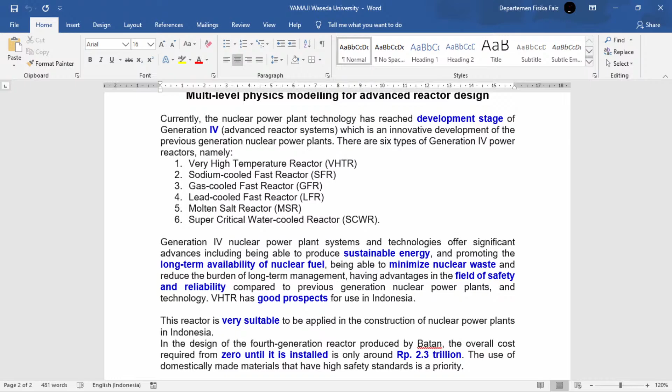Generation 4 is also able to minimize nuclear waste and reduce the burden of long-term management, as well as having advantages in the field of safety and reliability.

We can say that generation 4 nuclear power plants are a good prospect if used in Indonesia or other countries. I read in some magazine or website that if we design generation 4 in Indonesia from zero to finish until installation, the cost is around 2.3 trillion, not 11 trillion. Just 2.3 trillion. So it's a very good prospect in Indonesia.

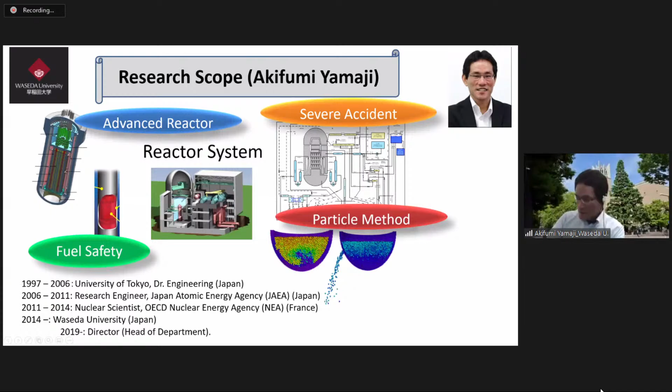Going into the contents of my presentation today, I have prepared some slides in basically two sections. One is an introduction to reactor core design—maybe for professors this won't be so new, it's introductory to core design, reactor physics, thermal hydraulics, and fuel performance. Part two is a brief introduction to advanced reactor design, but I specifically picked what I know best, which is the supercritical water-cooled reactor, so I'll talk a bit about SCWR. I've picked an example like minor actinide transmutation with SCWR. Let's see if I can arrange my presentation well.

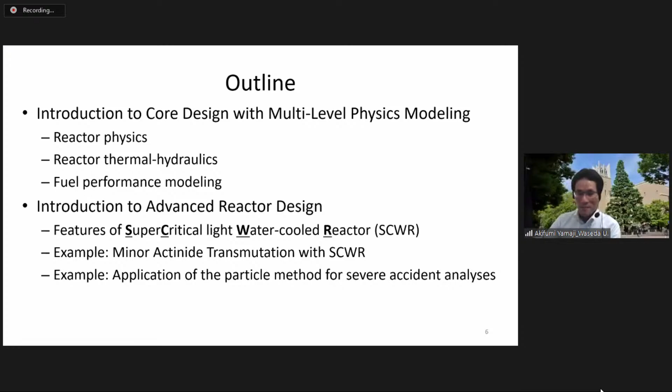Let me start with introduction to core design, reactor core design. So what is core design? You can design anything—in engineering work you design cars, computers. I am now talking about designing a nuclear reactor core, or maybe I should say conceptual design. In concept, for designing a reactor core, we have design targets. There are many design targets, but I've picked the dominant ones: of course we want to generate electricity, that's our main purpose. There are many different ways to utilize nuclear reactors, but primarily we want to generate electricity. Another target is we want to utilize our uranium resources as efficiently as possible—we don't want to waste uranium resources. So if I pick two targets, these are the main two.

On the other hand, there are always criteria you have to satisfy if you want to design a reactor safely. These are the design criteria often considered first at the conceptual design stage: reactivity control, that's reactor physics; heat removal or transport, that's thermal hydraulics; and confinement of radioactive materials, that's fuel performance and management. In reality these are very complicated, with complex interactions between evaluation of electricity generation, evaluation of fuel depletion, and evaluation of safety—reactivity control, heat removal, and confinement of radioactive materials. Today I will try to break down these relationships in terms of reactor physics, thermal hydraulics, and fuel performance over the next 10 or 20 minutes.

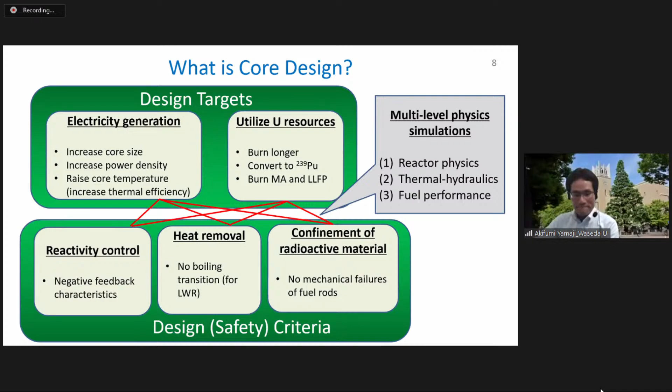This is very fundamental, so I may be boring some of you. If you're not familiar with this, then you can get into it.

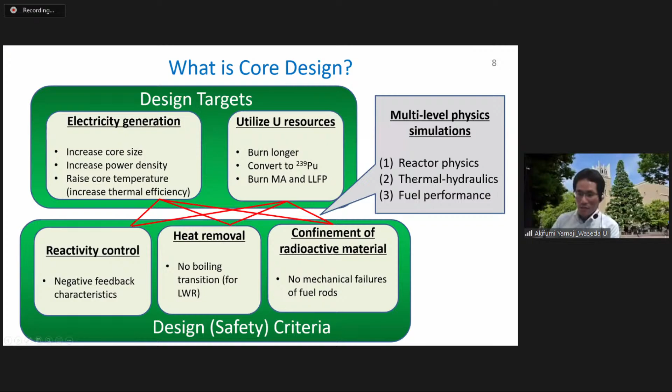There are three items that I will be talking about. Number one is reactor physics.

This is explaining basically what is simulated in reactor physics calculations in a reactor core.

I assume everyone knows that in the reactor core there are fuel rods, which contain uranium fuel inside. This is just a zoom up of four fuel rods.

Essentially what's being calculated in these simulations is tracking the reactions and transport of neutrons. The neutrons trigger reactions like fission, but that's not the only one. This is conceptually showing what kind of reactions may happen if neutrons interact. There are other reactions like capture, scatter, and so on. So basically what we do in these simulations is track neutrons and the reactions that happen with the transport of neutrons.

What we want to evaluate with these simulations is the relationship between criticality. That means we want to maintain chain reaction efficiency at a given constant rate, and we want to be able to control such reactions. In other words, we want to make sure there are always negative feedbacks to the reactor if any reactivity is inserted to the core. We don't want the core to explode in an easy manner.

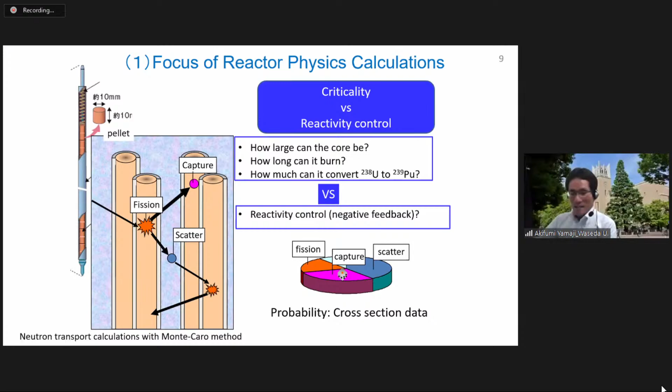So here is describing what I mean by reactivity control. This is explaining the requirements that a reactor core has to satisfy so that a reactor can operate safely without overshooting the power.

Maybe the figure is not so good. On the left-hand side I'm showing nuclear fission generating neutrons, which will trigger another fission. On the right-hand side, the same figure, but the situation is a little different. On the left, the power is low, and the coolant in blue is water. If the power is increased, we tend to generate void—gas bubbles. So what happens if we increase the power of the reactor from low to high? We generate gas bubbles, steam bubbles, in the coolant, and this gives feedbacks.

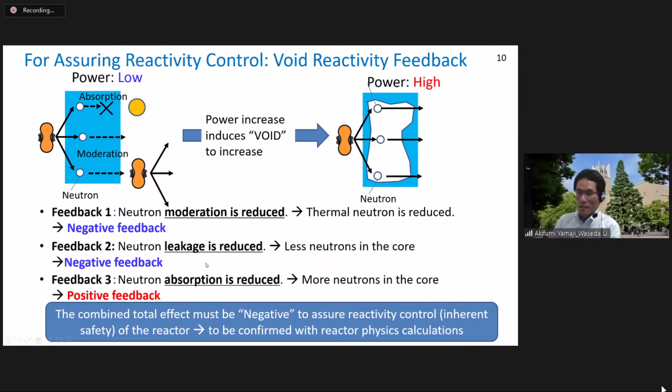That's the basics of reactivity control.

Part two is thermal hydraulics. This may be much easier. Basically, you generate heat, and you want to be able to transport that heat so your fuel does not burn out.

This photograph is showing you nucleate boiling. If I increase the heat flux of the rod, at some point...

...this will prevent or deteriorate the rate of heat transfer from the fuel rod to the coolant, and you will see burnout of the fuel rod. This is film boiling, so we don't want that.

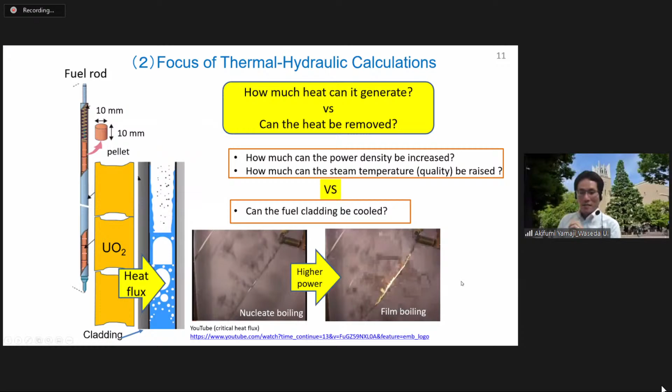This is a typical textbook explanation, so maybe I shouldn't go into too much detail to get you bored. But basically, if you increase heat flux, at some point you will no longer be able to remove heat efficiently, and your heating rod will burn out to a very high temperature. Obviously, if your reactor core experiences boiling transition, you cannot cool your core, and you will damage your reactor—so that's not what you want. This is the kind of evaluation done in reactor thermal hydraulics.

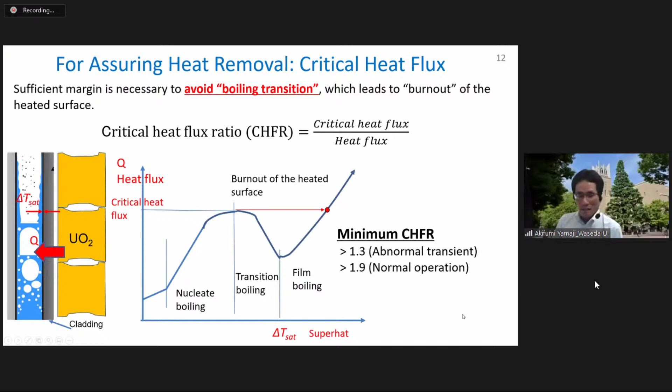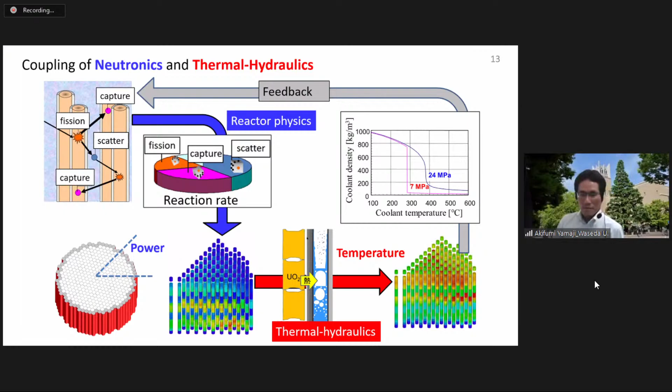So I have talked a little bit about reactor physics and reactor thermal hydraulics, and these are actually coupled. This is showing some conceptual relationships: in a reactor core you have fissions, which are controlled by neutrons, and this gives you reactor power. With these power evaluations, we perform thermal hydraulics analysis to make sure the heat generated by fission reactions is removed, and this gives you the temperature distribution in your core.

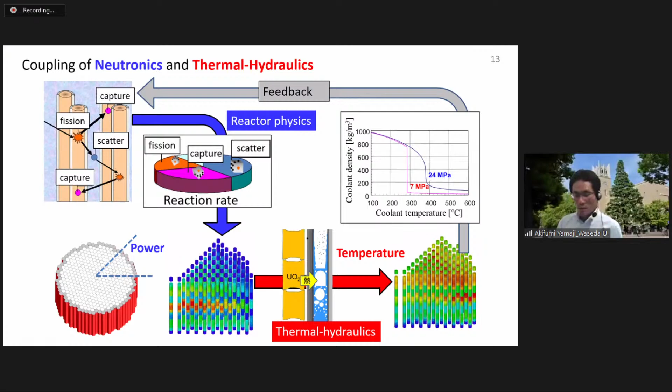Once the temperature distribution is known, you know the status of your coolant boiling situation, in case of a boiling water reactor, and this gives feedback to the fission reaction calculations. So these calculations are combined—this is the concept of coupling neutronics and thermal hydraulics, which is particularly important for light water cooled reactors. For some reactors these couplings are not so strong; there are reactors with strong couplings and weaker couplings. If you're talking about water-cooled reactors, like in Japan where most reactors are cooled by water, this is a very important relationship between reactor physics and thermal hydraulics.

The third part is a little bit different, but very important: obviously you don't want to damage your reactor fuel. So the third one is fuel performance modeling. Basically what you want to evaluate is that your fuel rod does not break—that's what you want. So we need to know how a fuel rod may break. This is typically in a light water cooled reactor core, where the typical failure of your fuel is what we call pellet cladding mechanical interaction, or PCMI.

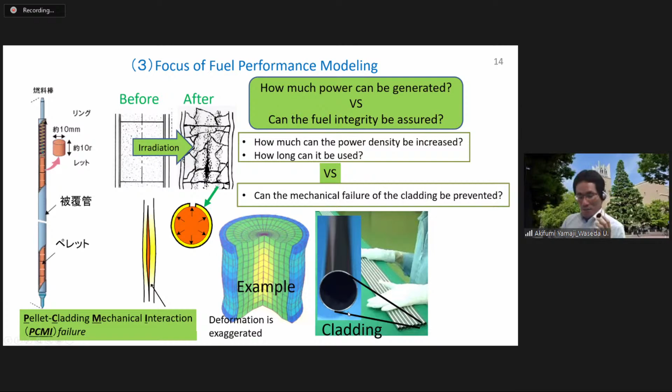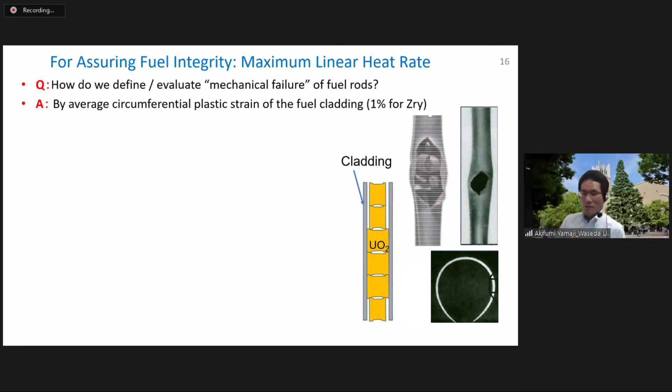The mechanism of PCMI is not so complex. Basically, you have a fuel pellet made of uranium dioxide, UO2. This UO2 pellet is enclosed in a metallic tube, which we call cladding. So how do we define a mechanical failure of fuel rods? This picture on the right-hand side shows some test results, not from commercial reactors but from experimental reactors, where the fuel rods have failed. Basically, if you increase your power too much, you get melting of the fuel pellet at the very center, causing volumetric expansion. The pellet will interact with the cladding until it fails—this is PCMI failure.

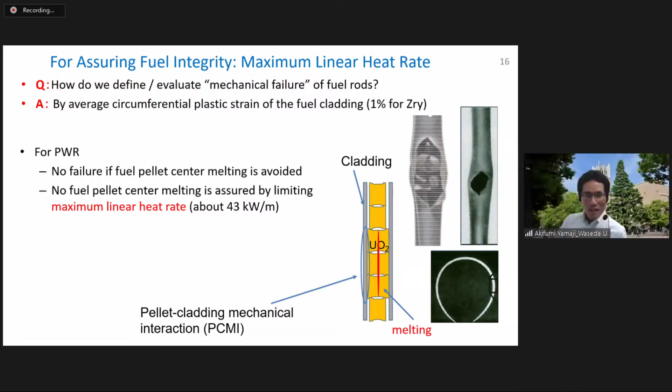So that's what you don't want. Okay, is it okay? Okay, I'll go on.

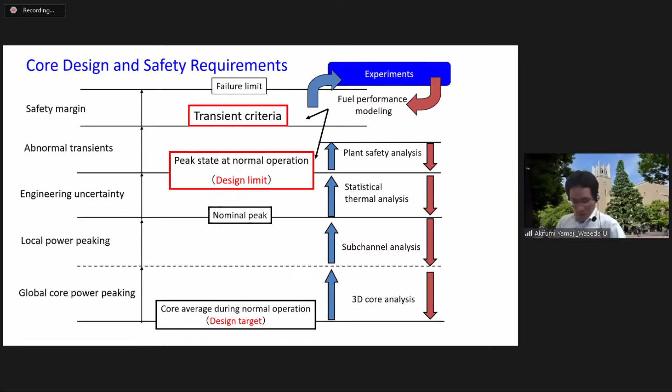This summarizes what we generally consider for designing a reactor in conceptual design. We start with a design target, evaluate global core power distributions—there are global power distributions, local power distributions, and engineering uncertainties. Then we can evaluate the design limit of your reactor, the very limits you don't want to exceed in normal operation. From that state we evaluate safety, abnormal transients or accident analysis, and of course we cannot test our commercial reactors in that way, so we do experiments to confirm that you do not break your fuel rods. Once you have experiments, you have feedback to your design targets. This is a kind of iteration between design target, design limit, design criteria, and experiments, and what connects these findings is simulations—you need multi-level physics simulations like reactor physics, thermal hydraulics, fuel performance. These are some examples, and this way we can develop a reactor concept.

So that was maybe the first part of my presentation, relatively too much basics perhaps, but covering the fundamentals of conceptual considerations.

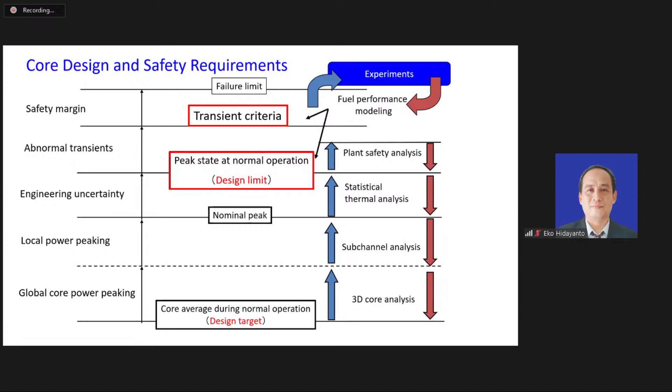So now I have talked too much about concepts, but maybe everything is conceptual at this point. But let me go on to generation 4 reactors.

As already introduced today at the beginning, there are 6 reactor concepts in generation 4 reactors. And I will be talking today about the supercritical water-cooled reactor.

Actually, generation 4 was formed roughly in the year 2000. I was a student at that time when these frameworks were being developed, so it was very exciting in those days.

But anyway, there are 6 different reactor concepts. Basically, all reactors have different reactor coolants. If you compare them, of course all reactors operate by nuclear fission. Some have different fuels, but the characteristic is they all have different coolants, like sodium or lead cooled, or here, supercritical water cooled. This is the only one among the 6 that uses water as the coolant of a nuclear reactor.

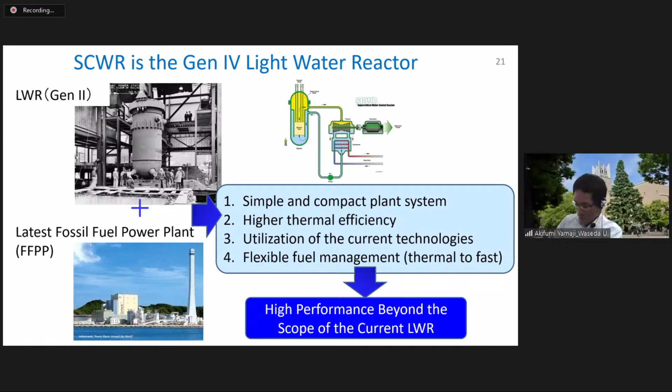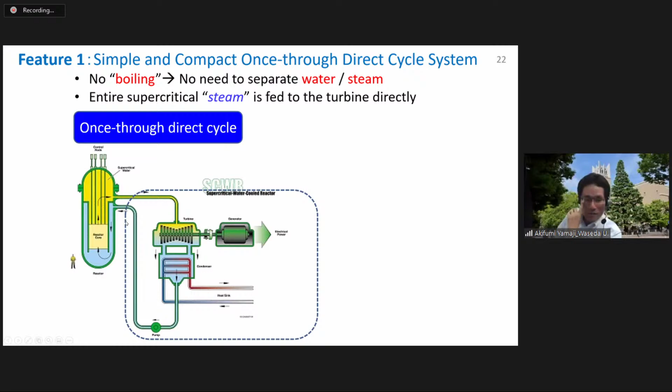So feature number 1: simple and compact once-through direct cycle system. This figure describes the reactor system of SCWR—the reactor core, the turbine, condenser, and pump. That's the system. What we mean by once-through direct cycle is that the reactor coolant exiting the reactor pressure vessel directly enters the turbine, condenses, and goes back to the reactor core. That's quite simple. If you compare with other reactor systems, you can see those systems are quite complex compared with SCWR.

So this is one of the features—there is no boiling of the coolant. The steam-like coolant exits the reactor pressure vessel, enters the turbine, drives the power turbine, generates electricity, and comes back to the reactor system again. That's the feature of the once-through direct cycle system.

The balance of plant, meaning the turbine system, is similar to a fossil fired power plant. Maybe I can skip some details here, but the specific enthalpy of the steam flow is high, the number of steam lines can be reduced, and high pressure turbines can be used, and so on. These may be minor points. The major point is that the system is simple and compact.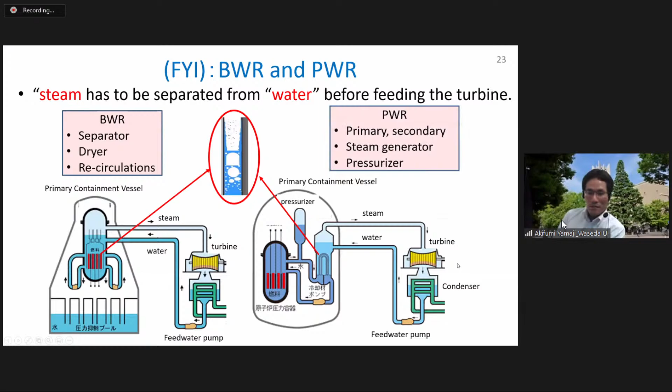Maybe I don't want to go into too much detail for the others, but feature number 2, high thermal efficiency. Basically, I believe many of you are familiar with this principle...

For SCWR, the typical design is between 500 degrees to just over 600 degrees Celsius, corresponding to an efficiency of 44 to 48%. You might think this is low or high depending on what you normally work with. But if I compare with current commercial light water cooled reactors, these are between 33 and 35%.

Feature number 3, utilization of current technology. Nuclear is a very difficult area, you cannot easily jump from one technology level to the next with a huge jump. We want to utilize our current technologies.

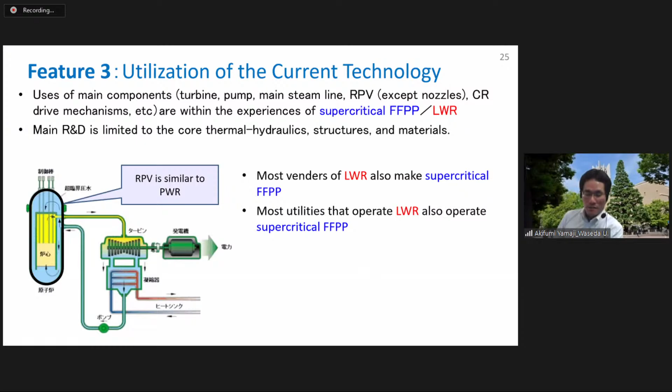Utilities are also capable of managing the system because many vendors of light water reactors, nuclear reactors, also make supercritical fossil fuel power plants. And the utilities that operate reactors also operate supercritical fossil power plants. So there is a good background for developing such technologies.

The last one, feature number 4, is flexible fuel management. This may not be so easy for people without a good background, but as I talked about earlier today, there is a strong coupling between the reactor physics and thermal hydraulics.

The reason behind this is reactor physics is quite sensitive to coolant density, because hydrogen atoms collide with neutrons. So what happens in a supercritical water reactor is that the coolant density changes very much within the reactor system.

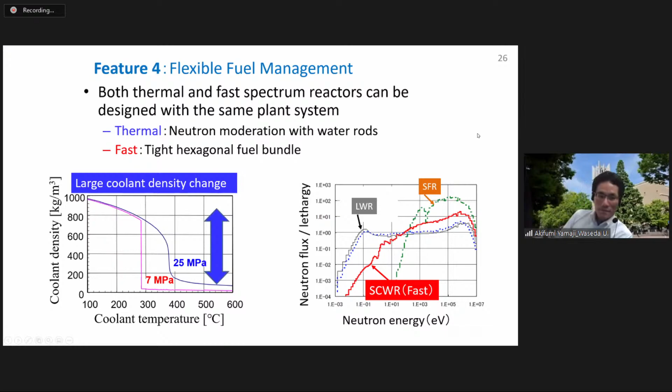Okay, so from here, maybe I can go relatively quickly. Research issues for SCWR include plant concept, core thermal hydraulics, materials, and corrosion. But today, I can only talk about core design, for either thermal reactor or fast reactor.

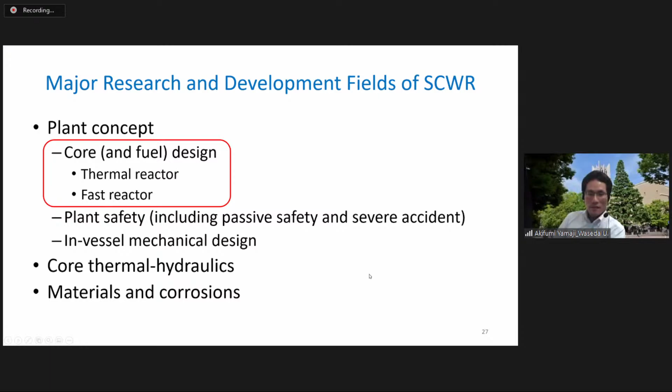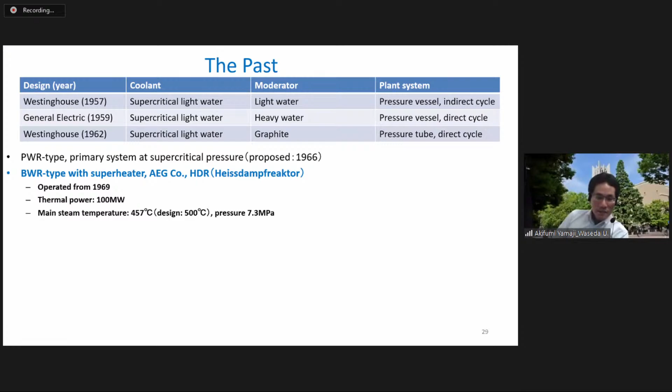Okay, some examples of the research. I actually found some histories, and I think this is the very beginning of generation for light water cooled reactor. That goes back as old as 1957.

This was only conceptual, but Westinghouse in the US proposed a design to cool the reactor system with supercritical light water, with a moderator using normal light water. Other designs followed in 1957, 1959, 1962 — these were the era when these reactors were proposed. But they were never built.

The one that was actually built is not quite supercritical, but it's a BWR-type superheater that first operated in 1969. This was rare, and it had a superheater that heats up the steam to a superheating state. So this was the only test reactor of its kind.

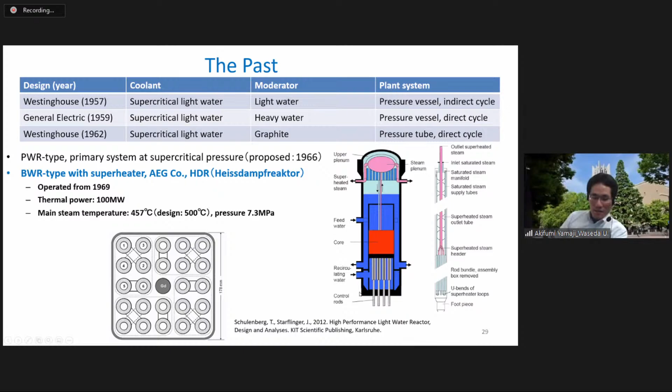Now, in current research, there are different families of supercritical water reactors in Canada, China, Europe, and Japan. So there are four major groups in SCWR research, with quite different design concepts.

These figures at the bottom show the fuel lattice, fuel rods arranged in these manners, sometimes with boxes, and these boxes contain water that provides neutron moderation — meaning neutrons colliding with high density water inside these boxes. So anyway, there are four different reactor system groups, and Japan is one of them.

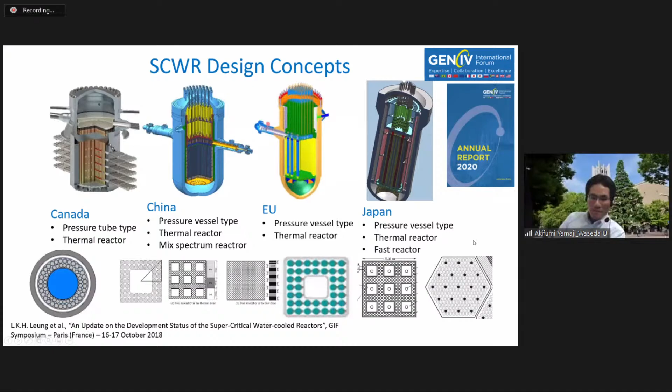I've picked up one topic, just one, about minor actinide transmutation. If you're from the physics department, maybe you're very familiar with this, but we have uranium and plutonium in the periodic table. These are the elements we call minor actinides — meaning actinides, but not the major ones. They're called minor, but they're actually quite important.

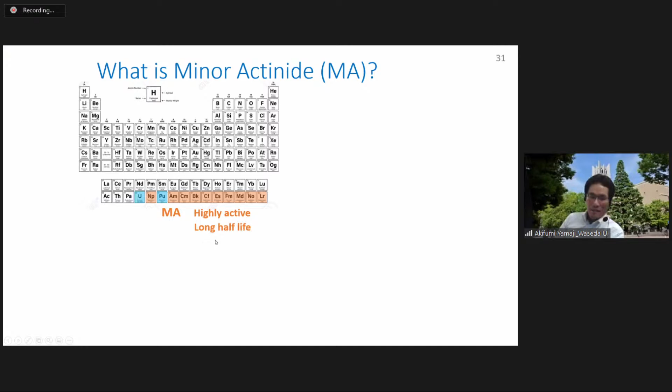They are highly active and long-lived. So after using the reactor, the spent fuels have to be disposed of, but they are highly radioactive. The reason for that is because they contain a large amount of minor actinides.

The figure here shows toxicity against the years after discharge from the reactor, in log scale. One of the reasons society isn't so confident with nuclear reactors is because you have spent fuels that are highly radioactive for many years, and one of the reasons is the high content of minor actinides.

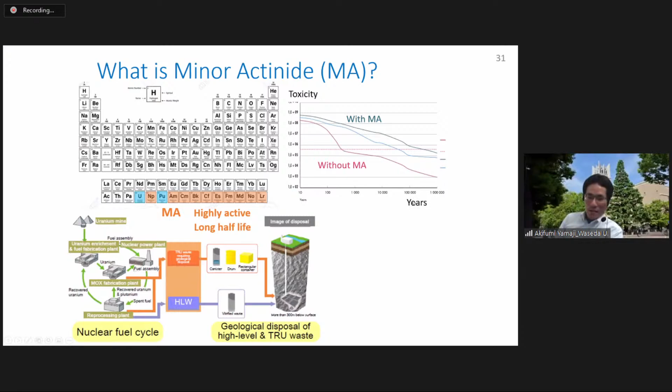If we could separate minor actinides from the spent fuel, this red line shows that the toxicity can be as low as natural uranium within a few hundred years. So that's a good thing — separating minor actinides from spent fuel lets us shorten the time needed for the spent fuel's radioactivity to be reduced.

Okay. Do I have some questions? Okay, safety.

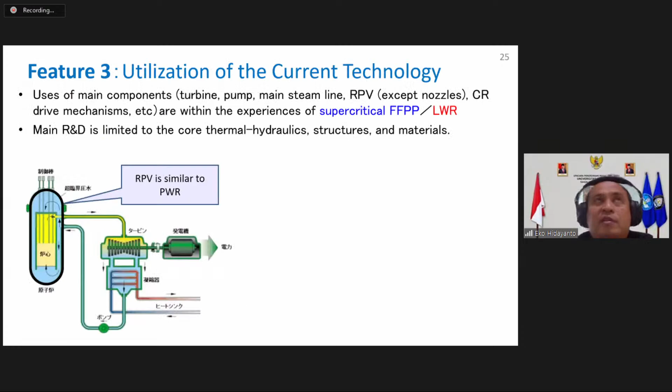Just a moment, Sensei. Maybe his question is about wanting to know the comparison between SCWR and MSR, where the MSR cannot stay stable at high temperature — and how about SCWR, and how about the safety between SCWR and MSR? Maybe something like this question.

Okay, let me try to answer. Different reactors have different safety characteristics. For example, MSR or sodium fast reactors operate at relatively low pressure, low operating pressure systems.

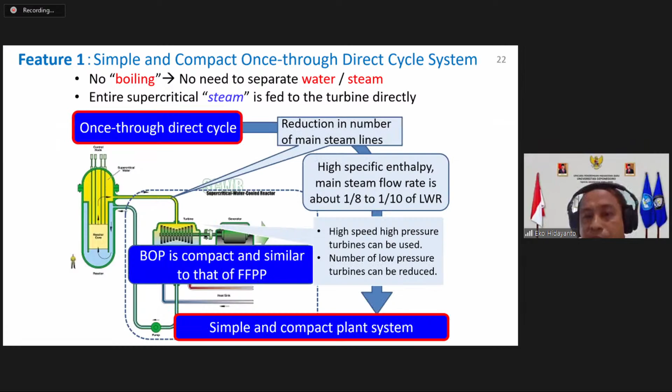Maybe you will continue your presentation, or some student will ask. Yeah, I don't have many more remaining, so I could go on, but I'm happy to receive any questions at this point. Shall I go on? Other participants please, if any question.

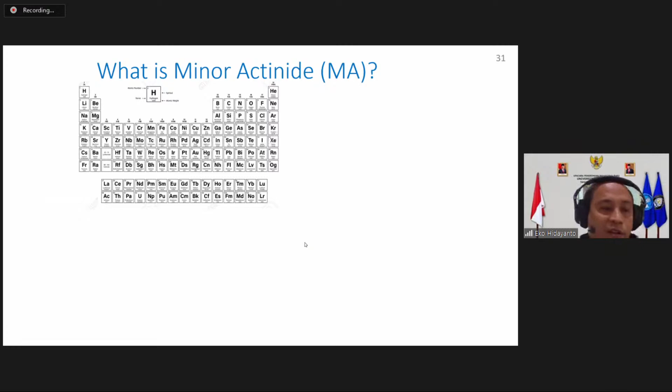So I get a message from our student. If our student wishes to get a master or doctoral degree in your university, what is the procedure to get a scholarship from your university, or Monbukagakusho maybe, or other scholarship? Or maybe you or Sensei can give some information about studying at your university, especially in your department. Please Sensei, if you have information.

I see, so typically, I forgot the name, but I see most students from Indonesia get the Indonesian government scholarship. In Japan, there are a few funding sources for scholarships for international students, but they are very competitive. Most international students get scholarship from their own countries before arriving to Japan. What I normally do is I always write recommendation letters, and I can also help write the research plan, so typically I help applicants prepare a research plan so that the applicant can be competitive in their own countries to win their scholarships. That's the way I have been doing for students from China, and a student from Indonesia as well, and so far it's been quite successful. So I don't recommend trying to get a Japanese scholarship after you arrive in Japan, that's quite uncertain.

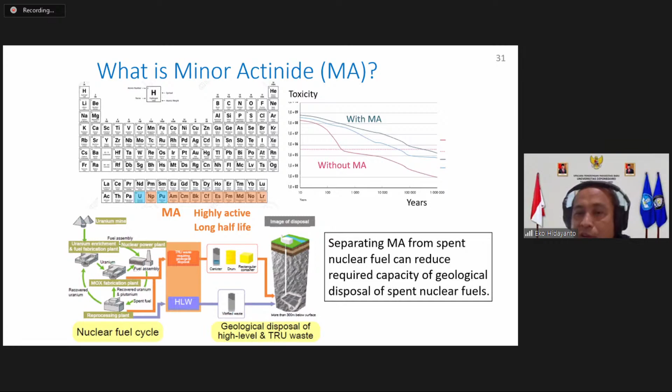Okay, that's good, reactors. Yeah typically like CO2 or helium gas, that kind of inert gas is used for gas cooled reactors.

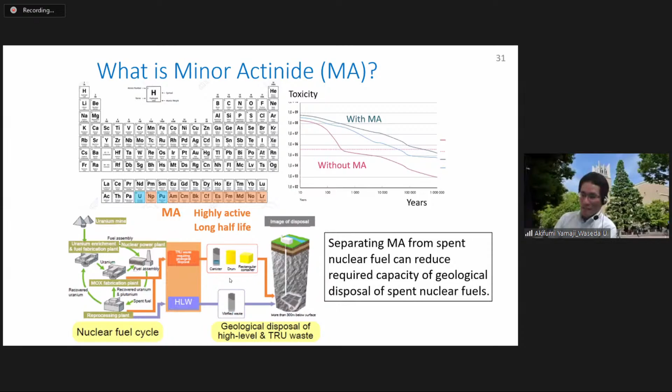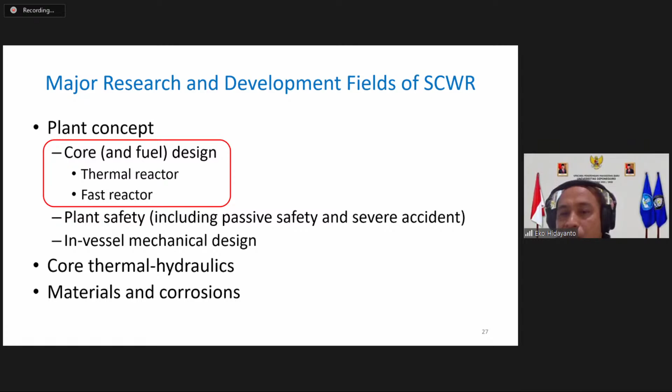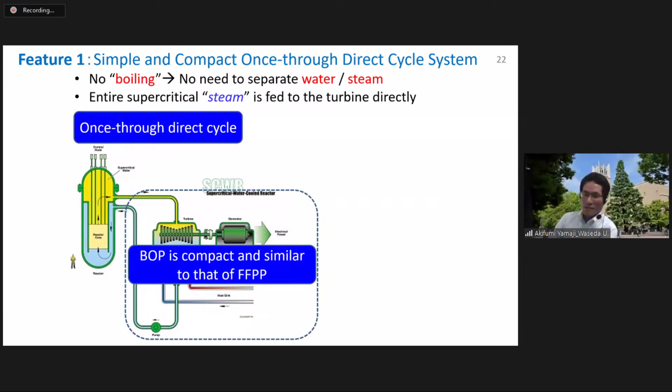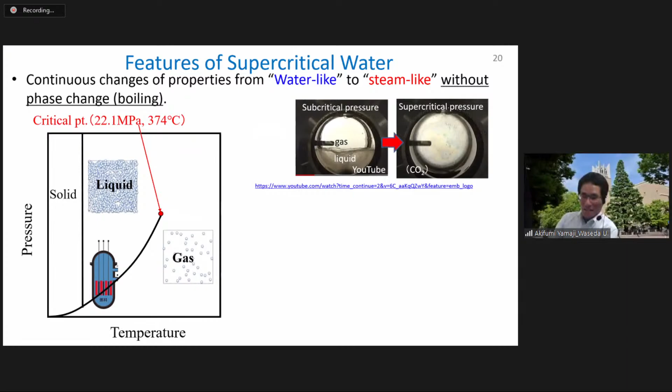Then there is a question from no name: Excuse me Sensei, I want to ask what kind of gas is used in the gas cooled fast reactor and how it works. So normally CO2, carbon dioxide, or helium, that kind of inert, non-active gas is used for gas cooled reactors. For these gas reactors, that's fine because you simply heat up the gas from low temperature to high temperature. Maybe the drawback is your core power density is not so high, because heat removal by gas is not as efficient as by liquid or boiling liquid. But anyway, generally inert gas like carbon dioxide or helium is typically used in gas cooled fast reactors.

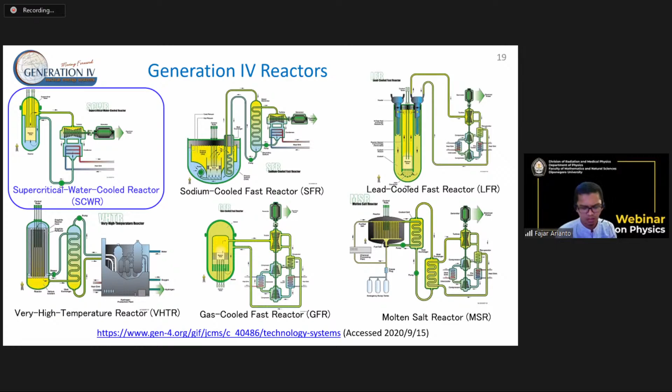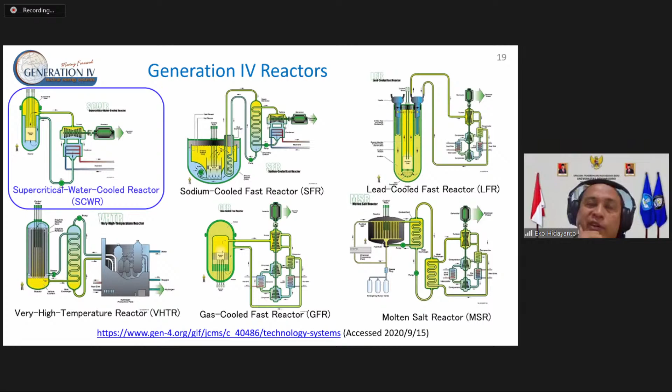I also want to ask Yamaji Sensei. As you know, in Indonesia there is no nuclear power plant till today. Some years ago scientists asked our government to build a nuclear power plant, but it hasn't been agreed until now. In your opinion, what should be prepared to build a nuclear power plant, so we can give suggestions to our government?

That's a very difficult question. I think many countries have different reasons for either proceeding with nuclear or not. I see that in many countries safety is one big concern. Another concern may be large investment. What I have been seeing recently is that not many private companies can afford to invest in development of nuclear power reactors because of large uncertainty. So generally, any country that wants to introduce nuclear requires large support from the government, but the government doesn't have much funding itself either. So this is, I think, a large drawback.

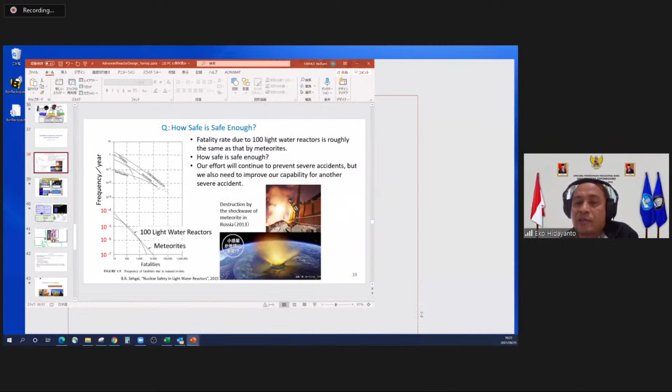This question is from our lecturer also. Yamaji Sensei, Anam Sensei asks about the view on nuclear power plants, that people always refer to accidents such as Chernobyl or Fukushima Daiichi. How do we convince society that a nuclear power plant is safer than a conventional power plant?

Honestly speaking, I don't have an answer, I only have suggestions. I was about to talk about this too. Here is a question that I ask myself: how safe is safe enough? The figure here shows the fatalities, the number of fatalities, and the frequency per year.

The figure is quite old and not so easy to see, but you can see natural disasters like earthquakes, tornadoes, hurricanes here in log scale, down in the range of 10 to the minus 4, 5, 6. I have two lines: one is meteorites, meteorites hitting the earth and killing people, that's the kind of frequency you'd expect. And if you compare this line, another line here is the fatalities expected from operation of 100 light water reactors.

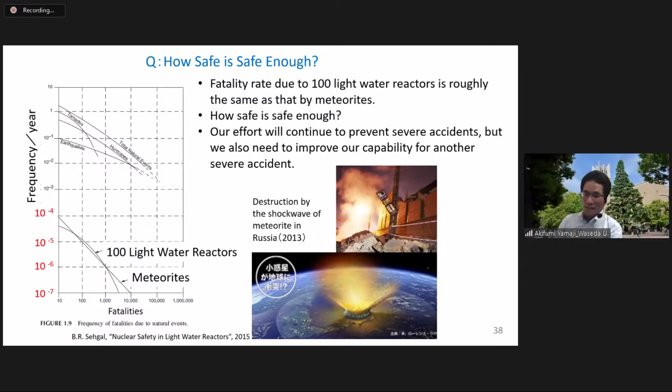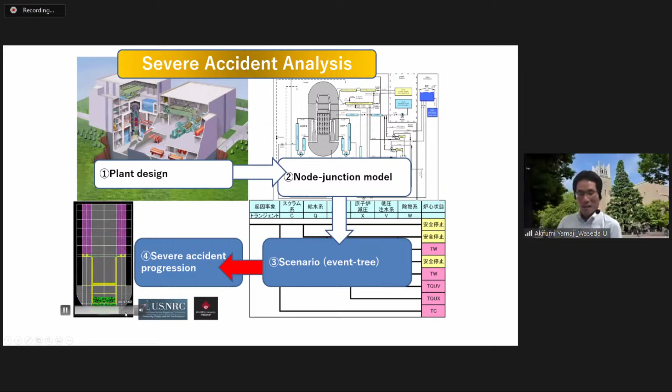So now what I can do is, for example, work on different stages of core degradation - what may happen if the fuel melts during a severe accident - in much more detail than what used to be simulated in severe accident analysis codes.

And of course, the point here is that we cannot do experiments. Many phenomena expected during nuclear reactor accidents, we cannot test experimentally - it's too dangerous, too large, too hot. So simulation is one solution. That was not so sufficient in the old days, but now, with much more powerful computation power and advanced simulation techniques, this is a new area we can apply at universities. This will give you much deeper understanding of what may happen.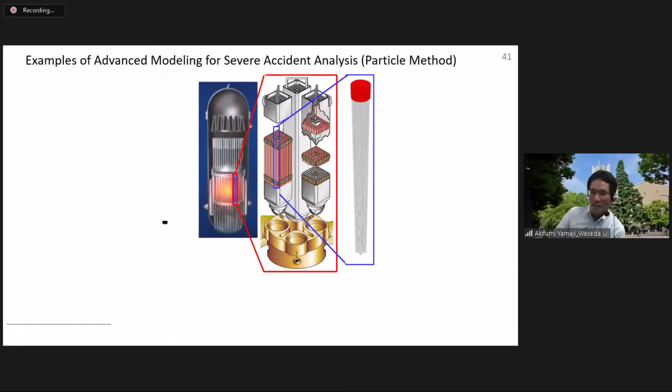I see. Okay, and we have some—well, typically it's a kind of on-the-job training. So the students who work on all the simulations I showed today are students. They learn—most of them join my lab with almost zero knowledge of these simulations, but they quickly pick it up.

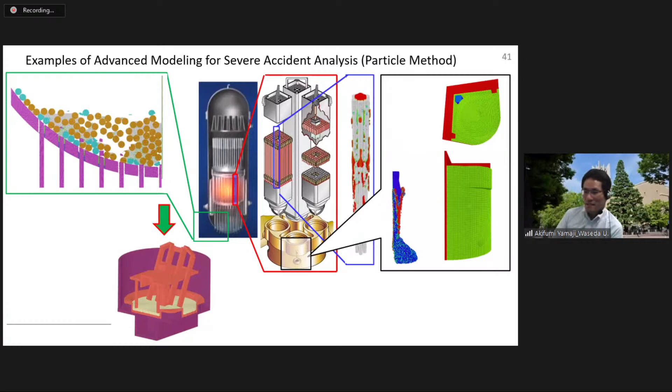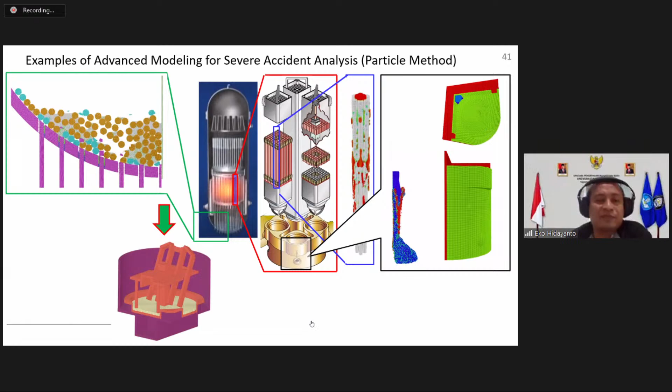And we work together, like everyone. Well, it's difficult today because of coronavirus, but everyone sits next to each other and learns every day, so it should be fine. So it means it's like learning by doing - everybody gathers together, gives ideas, and works together on the program, helping each other. Right, exactly. Well, it's a good experience, especially for our students, so they don't need to be worried if they want to learn about computational modeling in nuclear reactors.